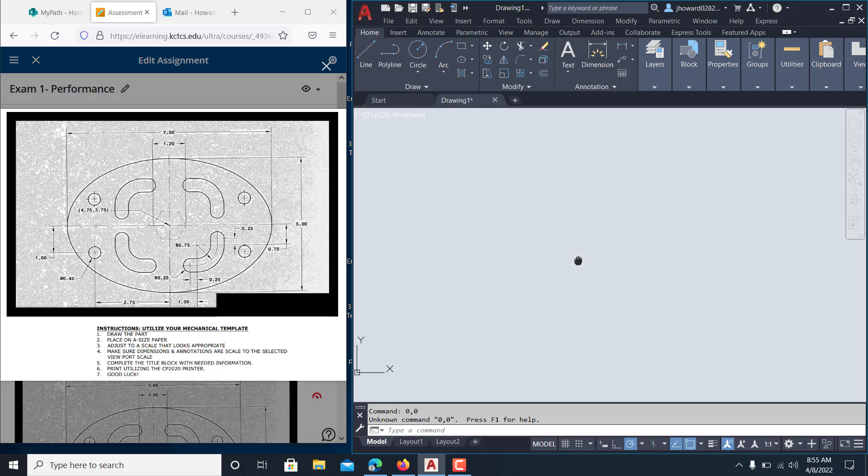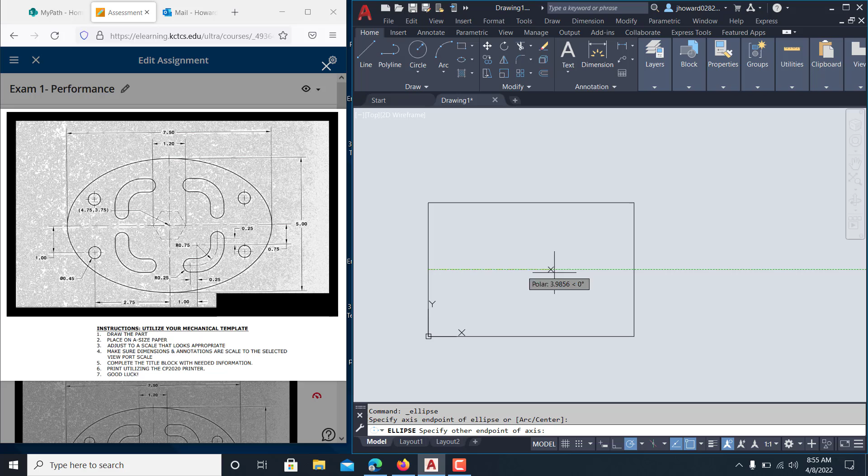So what I do, I like to use just a rectangle. Start at 0,0, enter, and I'll come over 7.5 in X and 5 in Y, and make sure my midpoint is turned on, which it is, in my snap. And I come up here and I grab Axis, End. You catch there, to there, and there. There's that. And I'll just go ahead real quick and put me some center lines in this thing.

Just like that. And the rest of it's pretty simple. Let me show you what I would do.

Do you see here, if I zoom, it's kind of hard to see that, but anyways, there's an offset from that center line down to here, which is 0.75. So I'll go ahead and do that. 0.75, enter. Offset of 0.75, enter. And I'll do that offset, so that offset there is the center point for this.

Now, this line here is offset of 1, so I go down here and I do that, and it gives me a center point for this 0.75 radius, which I'll go ahead and put in.

Just like that. Now you'll notice this right here is the quadrants, right there and right there. But if you'll notice, it goes a straight line as it gets to the end of that. It goes a straight line up 0.25.

So hit your line, and you'll notice from right here, it's going to go up 0.25, enter. And also it's going 0.25 that way from that point. Trim everything out.

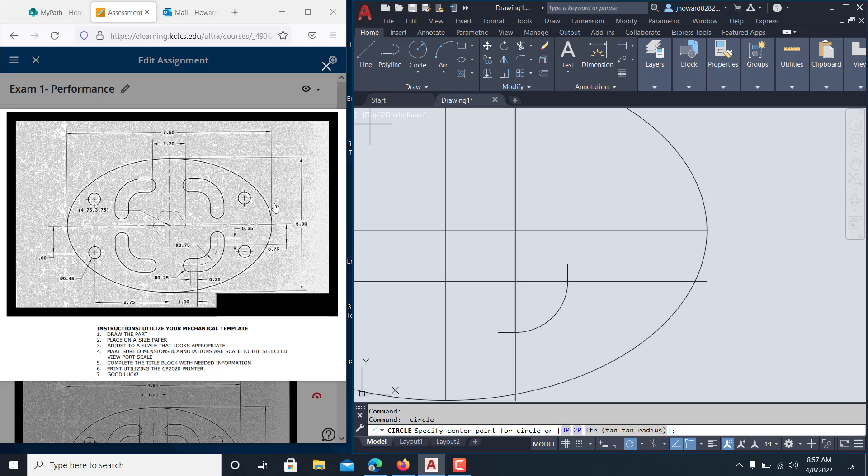Just like that. So there is your center. And at the end of that 0.25 on both ends, you've got a 1/4 inch radius.

So right there, 0.25. 0.25. And all you have to do is offset this stuff up 0.25, just do an offset. 0.25.

Both sides. And trim it all up, but you don't want...

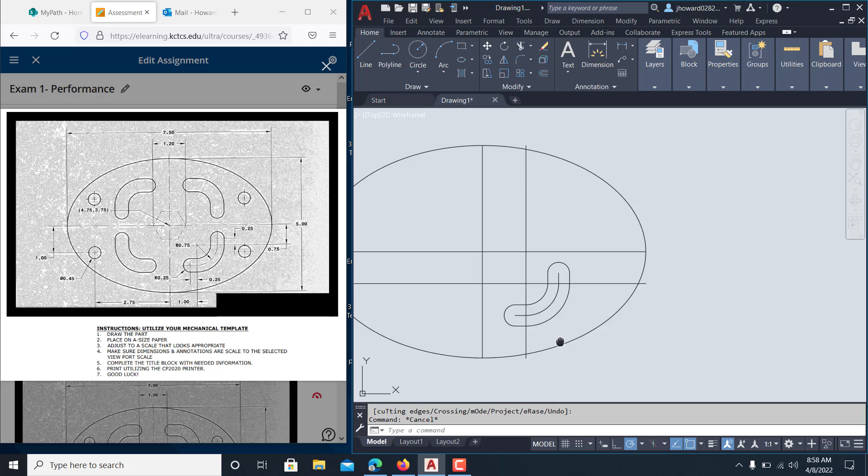So you got that much of it done. I'd go ahead and just get rid of that center line for the moment. I'm just going to go ahead and just get rid of this right here too for the time being.

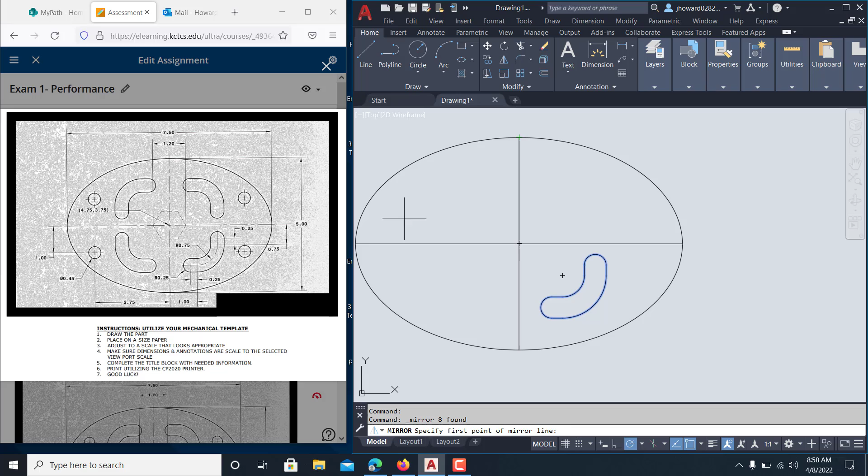And all I'll do is just grab all this, and I want to do a mirror. You got a mirror right here. Click it, and that's already chosen. It's asking you now for the mirror point, the mirror line. Is this line right here from that point to that point? Enter. Grab all of them and flop them to the other side.

Mirror. This time the line will be from here to here. Enter. And then you just got a couple of circles to put in, and it's 0.75 down and 2.75.

So that's offset 2.75 from right here. We'll send it over and straight down. It looks like it's right here, just 1 inch down.

And that's the center point for, well, it could be either side. And then those circles are 0.45 diameter. So you got to find your diameter. Boom, 0.45. Space bar, do it again. 0.45. Oh, that didn't give us diameter, it gave us radius.

And you can take those two, mirror it to the other side, just like that. And all that's left is right in the center of this thing is a polygon, looks like a hexagon.

So come up here and grab your hexagon tool, polygon, and tell it you want 6 sides, enter, base point right there, and it's 1.2, so that will be inscribed because it'll be inside of that, inscribed. 1.2, it's asking for the radius, so 1.2 would be 0.6.

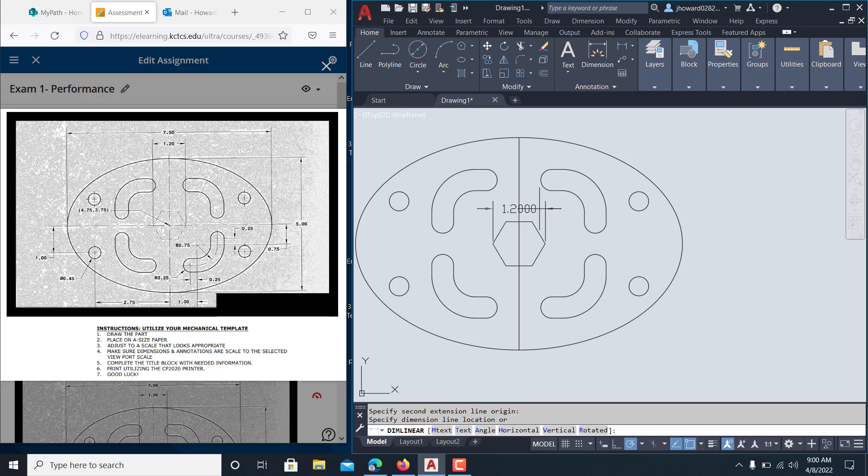And just make sure to do a measurement on it. Right there it is. And just get rid of the stuff you don't need.

So, and then make sure that you put this onto your layout, onto your paper. But that's just how it basically goes together. If you need help with it more so, just holler at me and let me know.